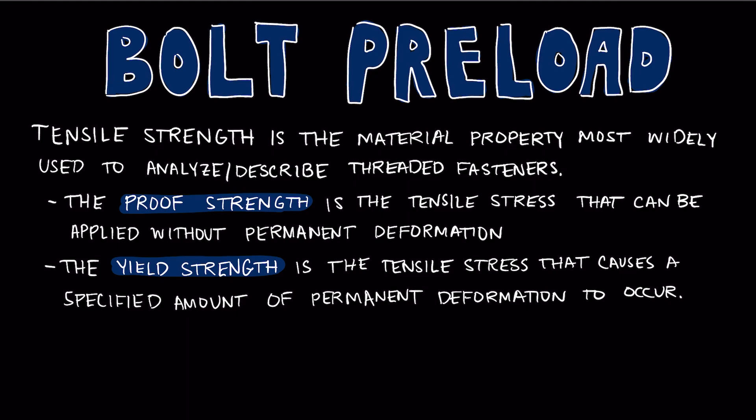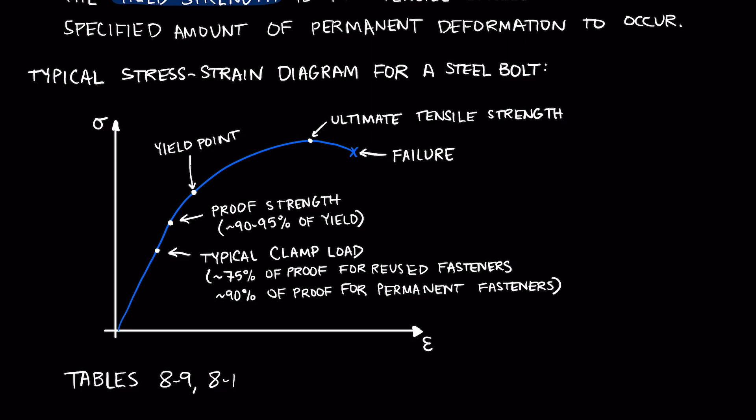There are tables in your textbook, I'll write out the table numbers here: tables 8-9, 8-10, 8-11 in your Shigley textbook contain material properties for different grades or classes of bolts, and bolts will have a marking on the head of the bolt that will indicate the grade or class of that bolt.

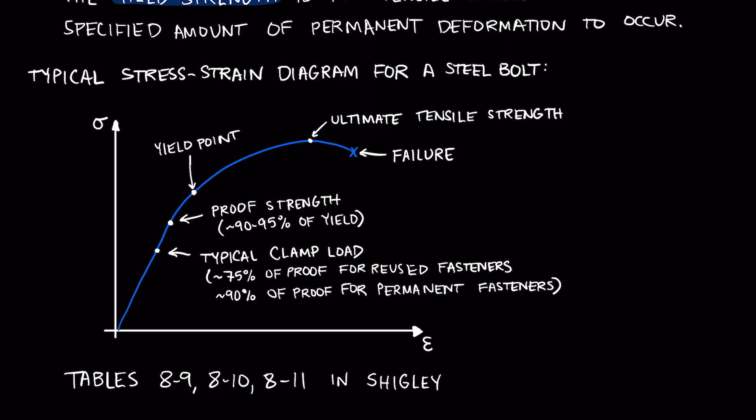For example, a grade 8 bolt will have 6 radial line markings on its head. I can try to draw that. So if you see a grade 8 bolt, it might look something like this, where it has these 6 radial line markings on its head to indicate that it is a grade 8 bolt. For a grade 5 bolt, you would have 3 markings. A grade 2 bolt, or an ungraded bolt, will have no markings.

And then in the metric system, you'll have a class of bolt, indicated by the class number on the head of the bolt, so it's a little bit more straightforward. I'll do just a quick example of that for a class 8.8 metric bolt. You would simply have this 8.8 on the head of the bolt.

I encourage you to go take a look at those tables in Shigley because it gives you the full listing of all the different bolt head markings you might see and their corresponding grades and classes. Remember that those grades and classes tell you the material properties of the bolt. So if I have a grade 8 bolt and the size is between, let's say, the diameter is between 1/4 inch and, let's see, 1.5 inches.

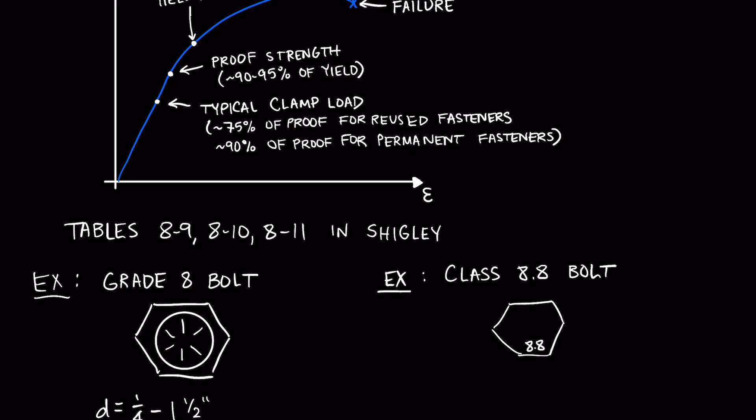As long as the diameter of the bolt is within that range, then I know from this table that my proof strength, which I'll designate SP, is 120 KSI, and I also know that my minimum tensile strength is 150 KSI, and that my minimum yield strength is 130 KSI. So you can find all of this.

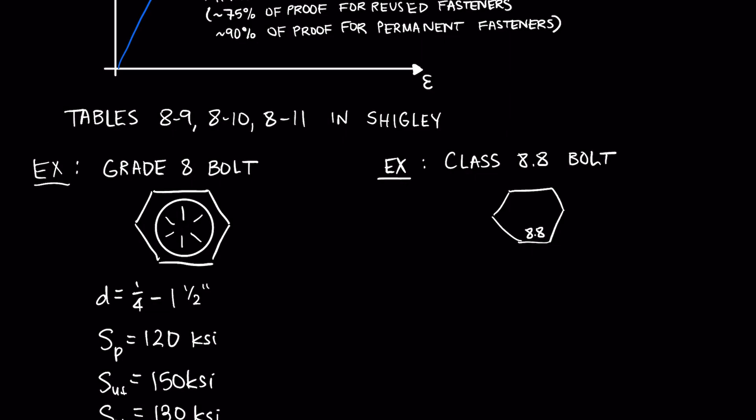This is from table 8-9, and with this proof strength, you can determine the clamp load that you want to apply, depending on whether your fastener is going into a permanent joint or one that might be disassembled in the future. I should note that nuts are also graded so they can be mated with their corresponding grade of bolt. The purpose of the nut is to have its threads deflect to distribute the load of the bolt more evenly to the nut. So it does matter if the grade of the nut mates with the grade of the bolt that you're using.

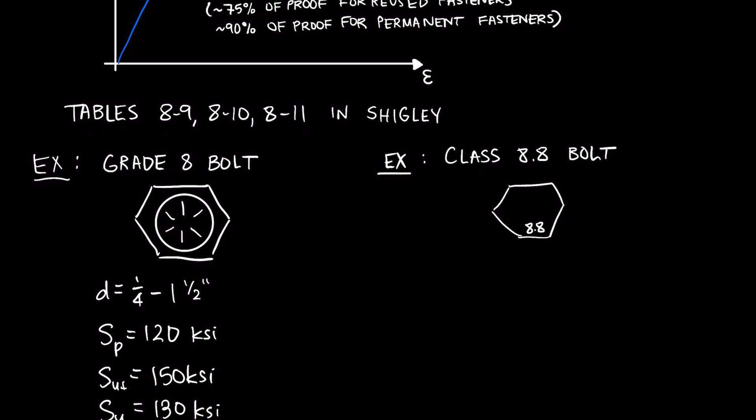Now let's turn to the even more practical matter of how do we measure the preload to ensure that we've applied an adequate preload in our bolted joint. And we have quite a few different options, so let's discuss just a few of them.

All right, so let's talk about a few different preload measuring methods. We're going to do so in this table that I've set up, and we'll compare the percent accuracy of each method along with the relative cost.

So first up, let's think about the simplest possible preload measuring method, which is just doing it by feel. No special tools, just use operator's judgment. I'm sure we've all done this, right? Whether it's complex machinery or just screwing in the cover on your light switch, you've used feel to apply a preload to a bolted joint.

So I want you to think about what accuracy you think you have when applying a preload to a bolted joint, and see if you're surprised when I tell you that on average that accuracy is about plus or minus 35%. We're going to give this a relative cost of 1, and compare the cost of everything else to this first method. So plus minus 35%, not great, but not terrible. And if you have a well-trained operator, you could probably get higher accuracies than even this.

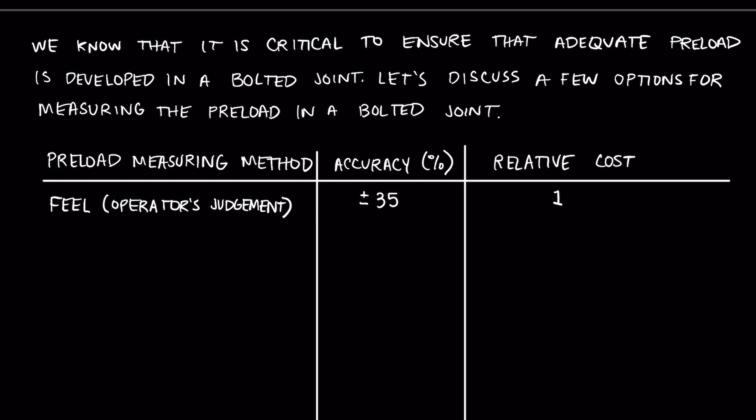All right, so next up, let's talk about a torque wrench. If you've ever worked on your car, you've probably used a torque wrench to tighten up the nuts on the wheel or possibly some other component of your vehicle. So torque wrench, I want you to try to guess what you think this accuracy is, and then I'm going to tell you that it's about plus minus 25%. Usually when I say this in class, students are pretty surprised, because this is a very common method for measuring torque, and we think about it as being very accurate. But in reality, there is about a plus minus 25% accuracy to a torque wrench.

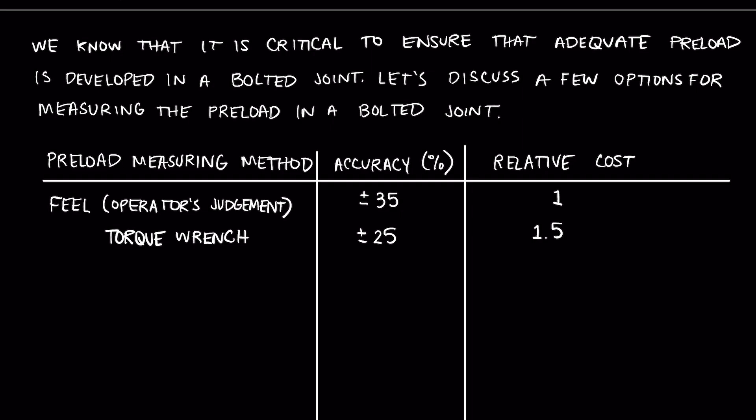All right, so next up we have turn of the nut. If you're not familiar with this method, essentially what it is we tighten up our bolted joint until it's hand tight, and then there's a specification for how far we want to turn the nut past that. So I'll try to quickly draw what I'm talking about here. Let's say this is our bolt. We are tightening it up. In our procedure, it says that we need to use the turn of the nut method, and we're going to rotate it 180 degrees past hand tight.

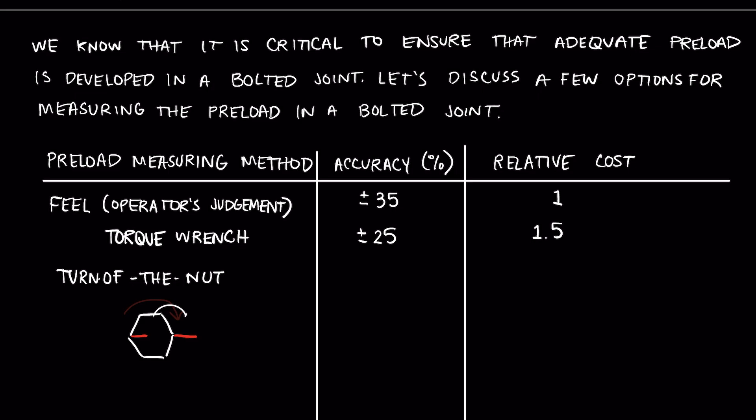So what you do is take a Sharpie or some kind of paint marker and mark a line going down the head of the bolt onto the member that you're clamping on, and then we would tighten this bolt 180 degrees until our lines look like this. So it's just a different way of measuring the preload by using a prescribed rotation of the bolt or the nut.

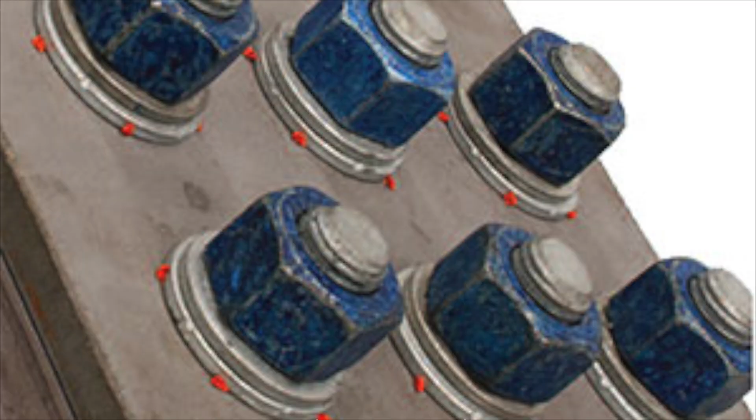They have these pockets of kind of plastic resin maybe embedded into the washer, and when you reach the preload that you'd like to achieve, they kind of seep that material out. It's usually colored a bright color, so you see this bright orange material coming out of the bolted joint when you achieve the proper preload.

The accuracy on those is about plus minus 10%. The relative cost, though, is 7. So we've got to buy these special washers, and you can imagine they've got to be pretty precisely engineered and manufactured to achieve this function where they indicate the proper preload. So they're relatively expensive compared to the other methods we've talked about.

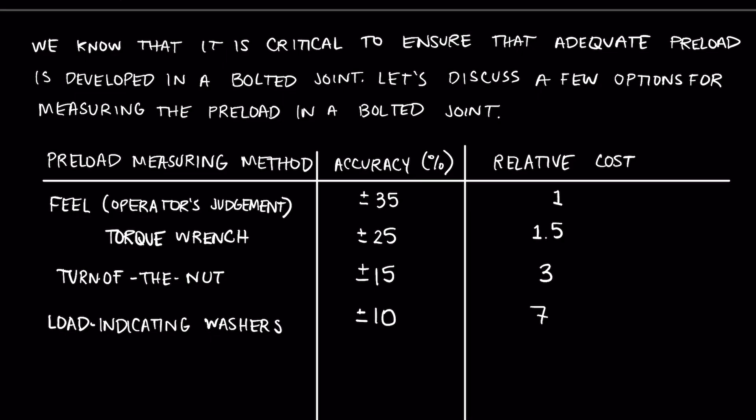Next up, we can look at fastener elongation. So fastener elongation is a method where we measure the length of the bolt before we tighten it up, and then we tighten our bolted joint, and then we measure again what the length of the fastener is after tightening.

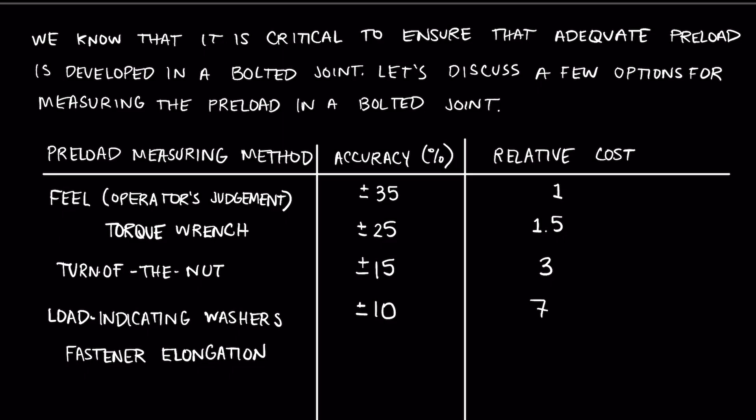So let me try to draw this quickly, just so you know what I'm talking about. So here we first take a pair of calipers and measure the length of our bolt. Then we assemble our bolted joint.

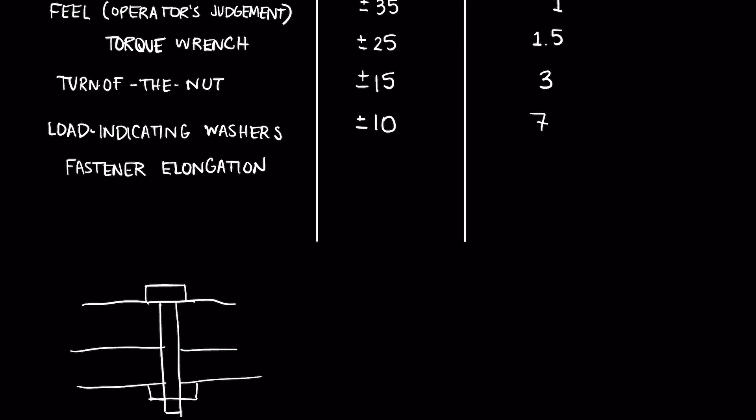As we tighten the nut, we're stretching the bolt and clamping down on the members, so this bolt is going to elongate. After we finish tightening, we remeasure the length of the bolt again. The difference in length will tell you the strain on the bolt, which you can use to back out the clamp load.

This method is fairly accurate, giving about plus or minus 3 to 5% accuracy, but the relative cost is 15. This is for a couple of reasons: first, the labor involved in measuring the length of each fastener before and after assembly, and also you've got to design your bolted joint to be accessible to a pair of calipers.

I need to be able to get into this joint as I've drawn it and place calipers on the top and bottom of the bolt. If the top and bottom are not easily accessible, I've got to redesign the whole bolted joint to use this method. That's why the relative cost is fairly high.

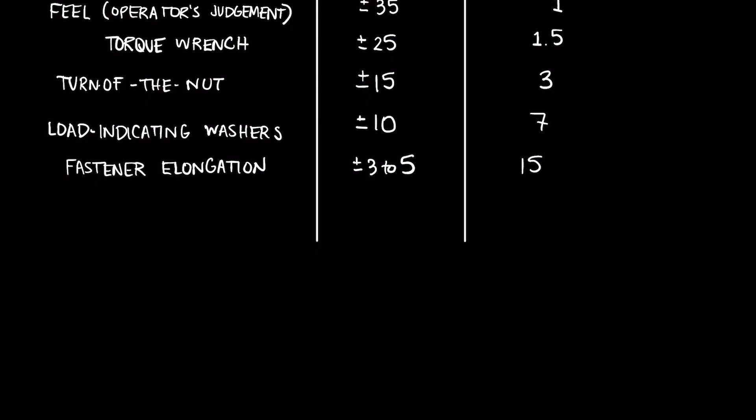Lastly, we have strain gauges, which I think most people will be familiar with. This is an instrumentation method where we simply apply strain gauges to the smooth section of the bolt. You're not going to want to apply it where you have the threaded portion of the bolt.

The accuracy of strain gauges is typically about plus or minus 1%. Of course, that depends on the strain gauge you end up purchasing, so you can go by the accuracy from that manufacturer—maybe you get a little better—but the relative cost is high, about 20.

You've got to assemble the bolted joint with the strain gauges installed, link that up to some kind of data acquisition software, and somebody's got to analyze that data and convert it into a clamp load value. So it's a relatively expensive method to use, but we get very good accuracy out of it.

That's our trade-off. Given all these different methods, the torque wrench is a common tool used to indirectly measure preload. So we want an easy-to-use equation to go along with our torque wrench value, since the torque wrench reports out a torque value. We need a relationship between that torque and the preload developed in the bolt so we can use that preload value with all the other equations we've already developed for bolted joints.

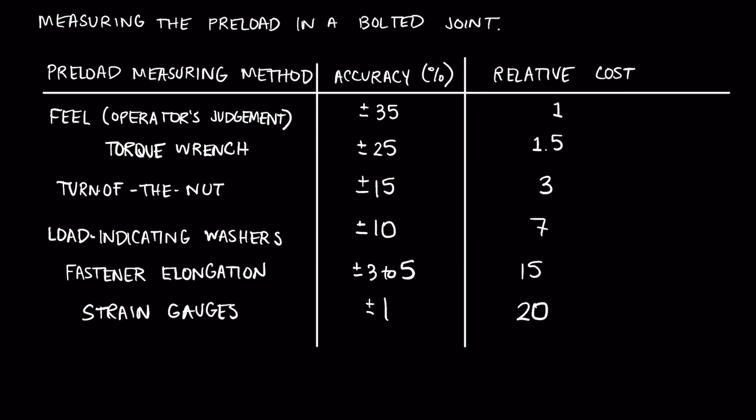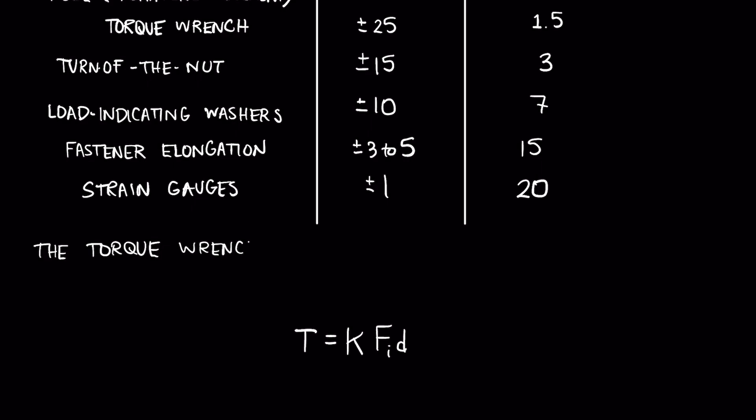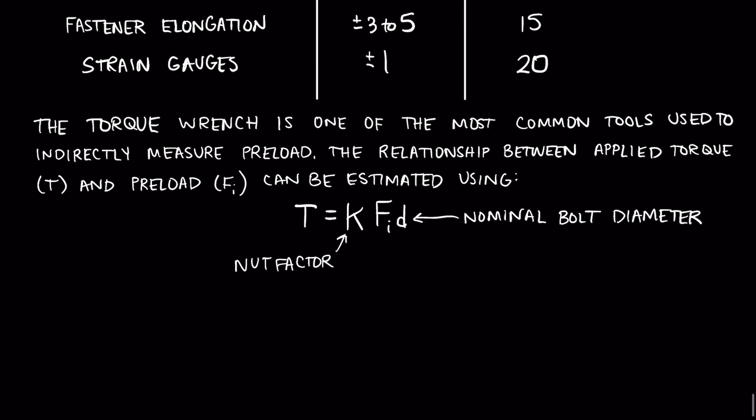We have a relatively simple equation we can use: torque equals K, F, D. T is torque, K is a new variable referred to as either the K factor or the nut factor, Fi is our preload, and D is our nominal bolt diameter.

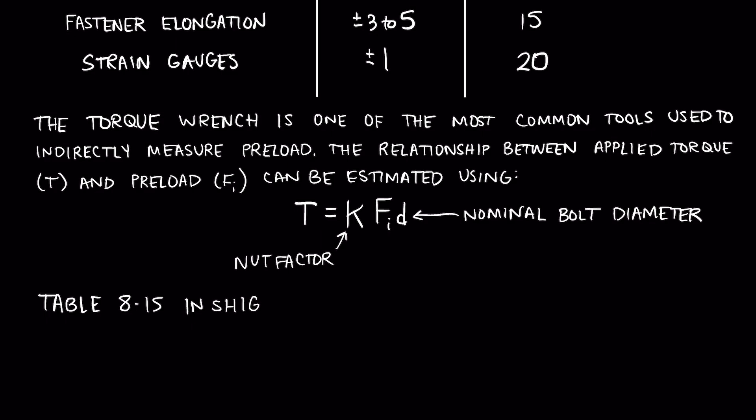For the K factor, we can use table 8-15 in Shigley to find published values. If your bolt condition is unknown, you can usually use about 0.2 as a reasonable estimate. Table 8-15 shows different bolt conditions like zinc-plated, lubricated, and cadmium-plated bolts, with K factors for each. If you're using a certain lubricant, the manufacturer will often provide an estimate of the K factor for it. But if your bolt condition is completely unknown, estimate your K factor as about 0.2.

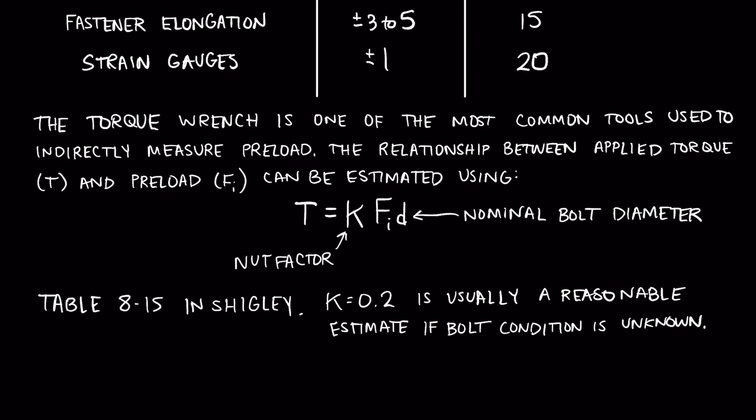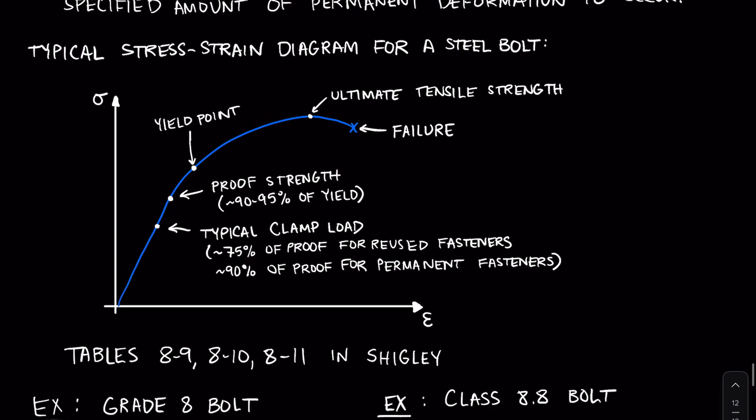That is all I had for this video. We talked about bolt preload, how to measure it, how to calculate what it should be based on the material, and how to determine what material you have based on the appearance of the bolt. I hope you found this video useful, and I look forward to seeing you in the next one.